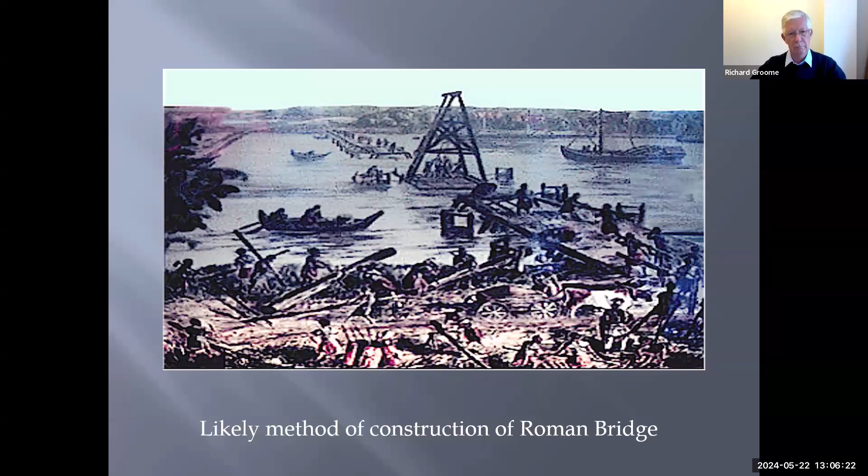That Roman bridge was almost certainly timber, because remains have been found on the north bank of the River Thames. The port of London, or Londinium as it was known then, developed on the north bank, and the tide of the Thames enabled seagoing vessels to visit. Also, because this was the lowest bridge on the Thames, it helped the Romans control southern England up to about 410 AD. After that, things are uncertain.

Does anyone here read Bernard Cornwell, or in particular, have you seen The Last Kingdom on Netflix with Uhtred, son of Uhtred? These novels were set in 871 to 899, that's King Alfred the Great's time, and he referred to a breached London Bridge with a great river flowing through his middle. At vast expense, I have contacted Bernard Cornwell, and he believes that this was still the Roman bridge.

But it was not to last much longer, because in 993, King Olaf of Norway was able to plunder Staines, about 30 miles inland, without encountering a bridge anywhere on this route. The next reference to the bridge thought to be reliable is in the time of Ethelred the Unready—Unready actually means ill-counselled in Anglo-Saxon, so he wasn't very well advised. But London was held by the Danes at that point, with a large fortress at Southwark on the southern side of the bridge, and a fairly stout timber London Bridge, heavily fortified.

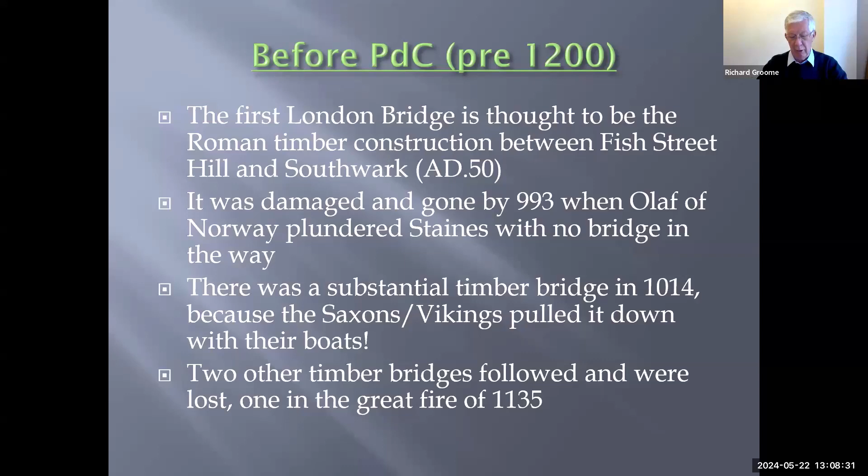Ethelred, supported by Olaf the Norseman, attacked the bridge in 1014 and were initially beaten off, but they then tied their ships to the bridge and rowed downstream, taking the bridge with them. Hence the expression and the song, London Bridge is falling down.

It is mentioned again as a whole bridge in William the Conqueror's charters of 1067. It was swept away again in 1091, destroyed by a great fire in 1135, far more damaging to London than the famous Great Fire of 1666. Small wonder then that the city, the church, and the king together decided to invest in a completely new bridge, and they appointed Peter de Colchurch to be responsible.

Was he an engineer? Well, no, he wasn't. He was a chaplain of St Mary's Church, where Thomas Becket, then the Archbishop of Canterbury, had been baptised. So the new chapel on London Bridge would be called St Thomas's, the starting point for pilgrims going to Canterbury. And it would stand on the great pier in the middle, taking the full force of wind, weather, and the river.

Peter de Colchurch's bridge would stand for over 600 years and was the only bridge in central London for 540 of those. It took 33 years to build. 10 of those were sort of wasted using a wooden construction, and they then switched to stone, which was interesting because there wasn't any stone for miles and it had to be shipped from places like the West Country of UK.

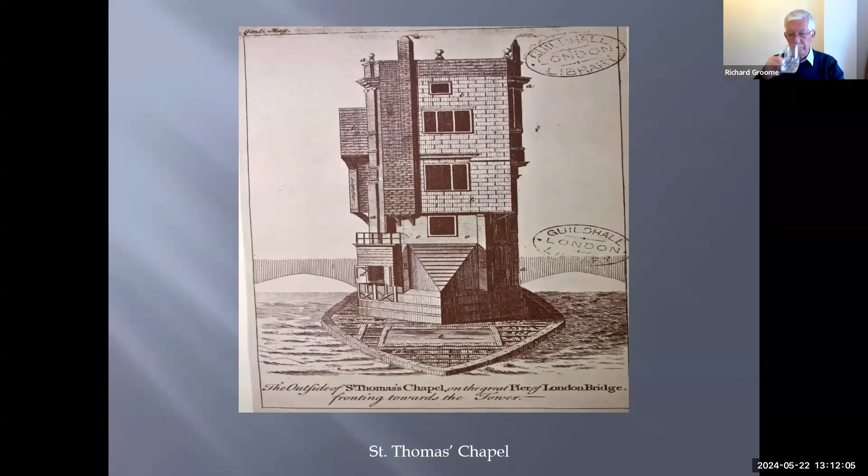There was nothing like this bridge in the rest of Europe, with the houses and shops ordered by King John to help pay for the upkeep. And such was the greed of the developers that many of the houses were there before the bridge even opened. Their upper stories projected across the street and out across the river, often propped up precariously, as you can see in this picture.

This was to get maximum income with very little space available. They were all built of wood. This picture in the London Museum is actually 400 years later, but it shows the idea quite well.

So underneath, the only road into London, barely 12 foot wide, swarming with people and animals and wagons, and underneath the perpetual noise of the water. Imagine the noise, smells, and congestion. Crossing the bridge could take an hour.

All the new houses were destroyed by fire within 3 years of their construction, with hundreds of people killed. There were frequent fires and quick housing replacements for many years to come, until the houses were removed by Act of Parliament in 1758.

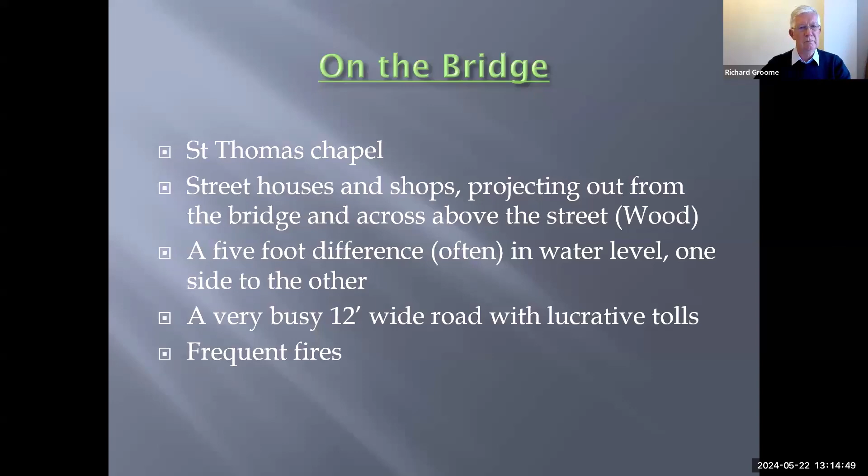The first person to go onto the bridge in terms of his head was William Wallace, or Braveheart. He was followed by Thomas More in 1535 and Thomas Cromwell in 1540. You might be interested in the demise of Oliver Cromwell, by the way.

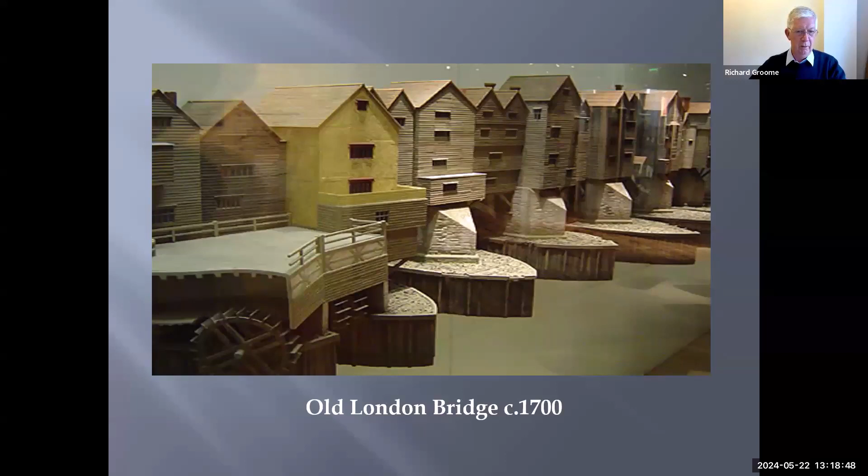But despite being picturesque and famous, London Bridge was very dangerous and very expensive. A whole house, complete with occupants, fell off the bridge in 1438. You can see there the water wheels on the northern side of the bridge, and the corn mills, I believe, are on the other side. That's a model in the London Museum.

So the bridge sank as it got older and heavier, losing its gentle slope up to the middle and ending up flat. Even then, they added those corn mills in the 16th century and the water wheels on the other side.

They all went up in flames in 1633, were rebuilt, and lost again in 1666. By this time, the bridge was so weak that £1,500 — a fortune, actually, worth about £1.5 million at today's prices — was spent shoring it up again.

In 1722, to reduce congestion, traffic was ordered to keep left. This good idea soon spread to other parts of the UK and is the origin of us driving on the left.

Another fire in 1725 caused a rebuild from the foundations at the Southwark end, where there was also a wooden drawbridge. It's all downhill from then for London Bridge — Nonsuch House had become a shop and the chapel a paper warehouse.

The opening of Westminster Bridge in 1749 was the death knell of old London Bridge. It was wide and spacious with no houses, so they took the houses off London Bridge and widened the centre arch, which the river tore through and ate away.

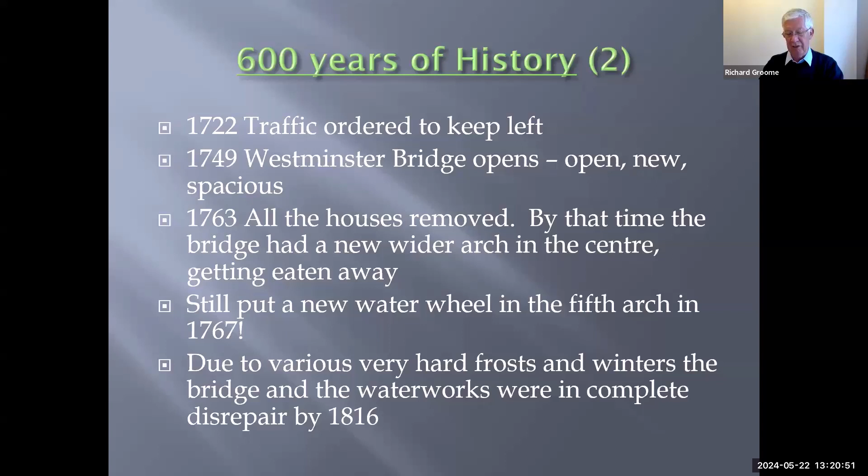They even then put in another water wheel in 1767, restricting the side flow even further. Then there were a series of vicious frosts in 1768, 1785, and 1789. By the start of the 1800s, the bridge was in total disrepair.

Here's a cartoon, top left, called the Melancholy Bridge, from 1758. And one of the fires in the late 1700s — that's the waterworks going up in smoke.

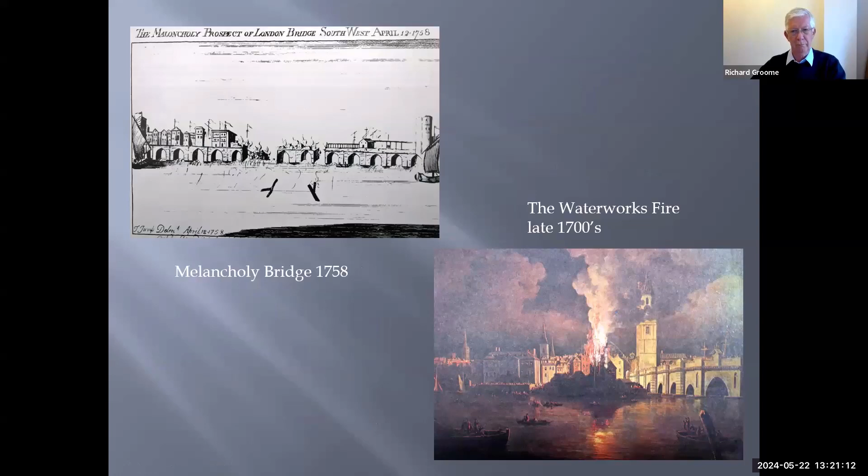A guy called William Gifford, in the Quarterly Review during 1814, said, 'This pernicious structure has wasted more money on perpetual repairs than would have been sufficient to build a dozen safe and commodious bridges, and has cost the lives perhaps of as many as 1,000 people.'

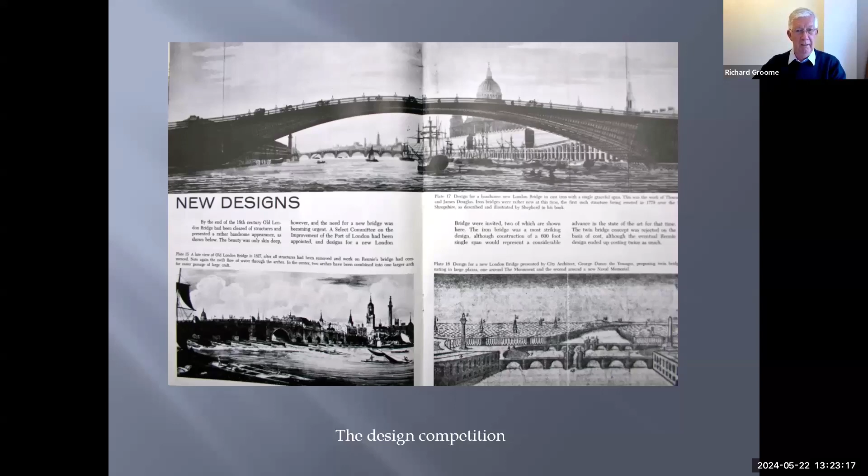We'll just talk about finance briefly. In 1821, Old London Bridge had an annual income from tolls of £30,000. There were $5 to the pound in those days, so that was $150,000. John Rennie's estimate for the new bridge was £450,000, so it would pay back in 15 years. In the event, a special toll on coal was introduced to pay for it more quickly.

John Rennie Sr. died almost before the work was started, so it was his son, also called John Rennie, who actually built the new bridge. It was built 100 feet west of the old bridge, which remained open until the new bridge was completed.

It was thought that once the bridge was demolished, the increased river flow might sweep away Westminster and other bridges now upstream, and they did actually require rebuilding or strengthening in some cases. But the worst did not happen.

You'll also remember I said that we would meet Peter Colechurch again in 1830. Well, it's during the demolition of the old London Bridge that his bones were found under the old chapel, but they were carelessly thrown into the river by a workman. What a shame.

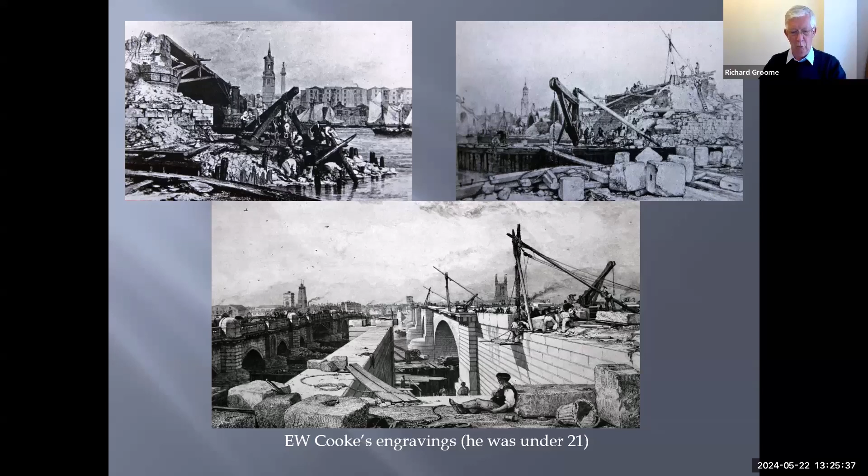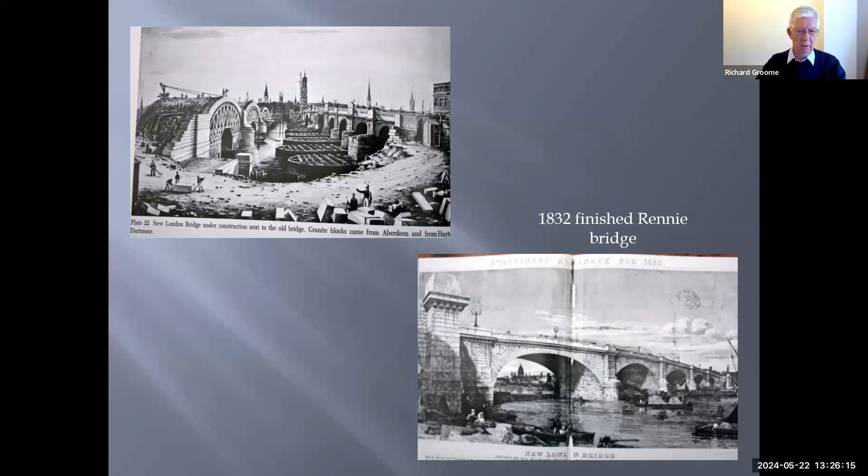The Rennie Bridge was pretty much solid granite and weighed 130,000 tons. It took 6 years to build and ran 18 months late—a typical civil engineering project in the UK, I might say.

It had a magnificent 53-foot wide roadway, but was so crowded with horse-drawn vehicles that it was said you couldn't cross London Bridge without seeing a white horse. It was now that the new railways were bringing in large numbers of commuters, so further weight was added to the bridge, with the addition of outer footpaths.

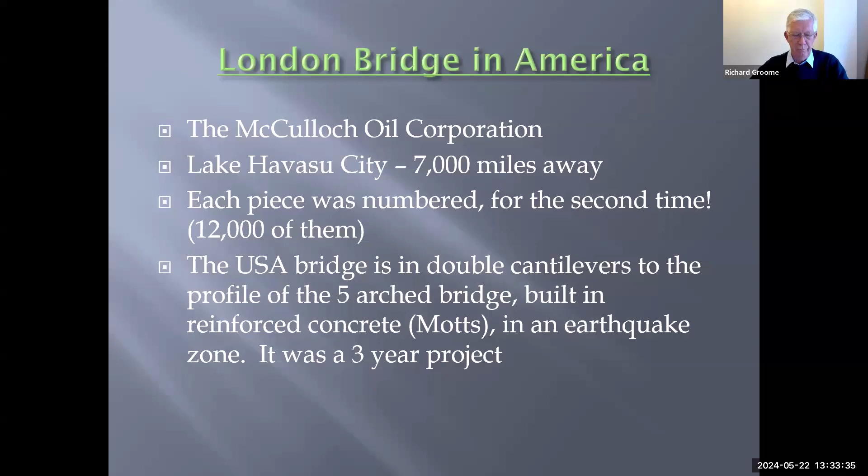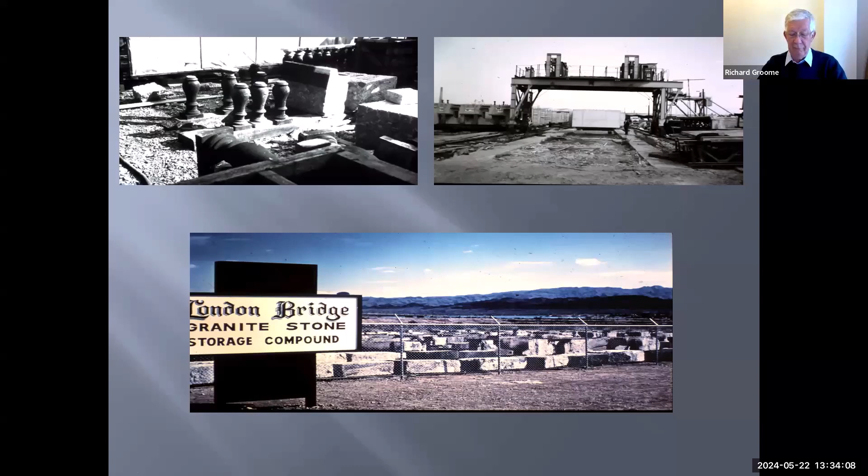It was discovered that the stones had been numbered once before, by Rennie no less, when the original bridge had been built.

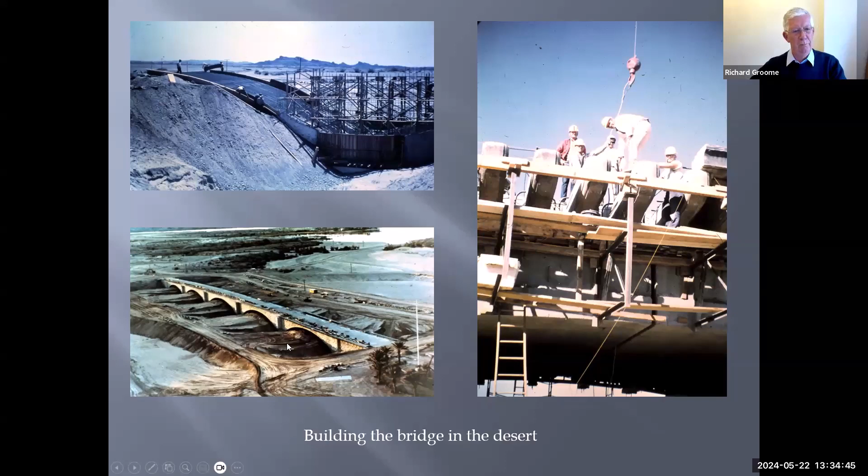So here we are in Lake Havasu City, where instead of using formers to build the arches, they used the sand, because this was a desert. There wasn't any water there, so they could just make an arch out of the sand, construct the new bridge underneath the shell of the old London Bridge, take out the sand afterwards, and then eventually put the lake under it.

Those pictures show the result of that. And that top right picture I promised you earlier is pretty much the same view as they took in 1832 when it was in London.

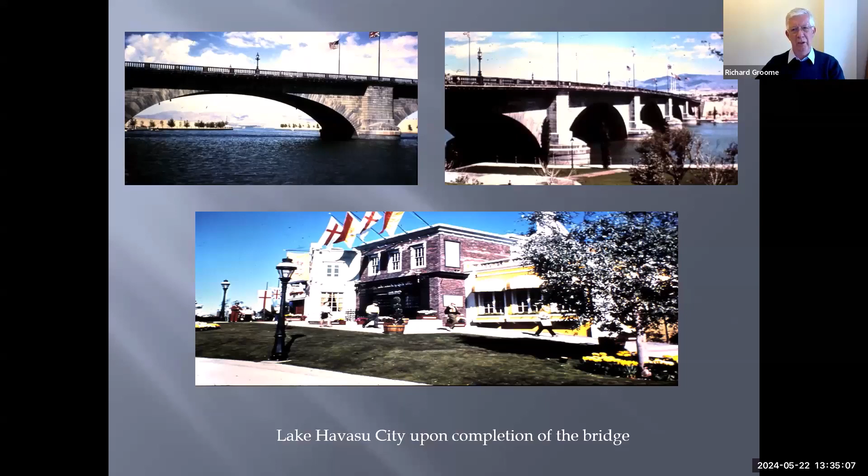Now we go back to the current London Bridge, called the New London Bridge. This was designed on the same centre line as the Rennie Bridge, so not built to one side like the old bridge had been. This time it would only weigh 55,000 tonnes. Work started in November 1967 and continued until 1972, but at no time was the main traffic or pedestrian flow stopped. You will see how it was done in a moment.

It is a 3-span, pre-stressed, post-tensioned concrete bridge designed as 4 parallel box beams. So it's hollow, and I have walked through it. It was built as 4 bridges joined together and was until recently the only hollow bridge over the Thames.

The new foundations are 100 feet below high water and were excavated by hand. They are 26-foot diameter at the base and 12-foot at the top. And of course, while they were digging this out, just alongside was highly stressed clay supporting the existing bridge. It must have been a tricky job.

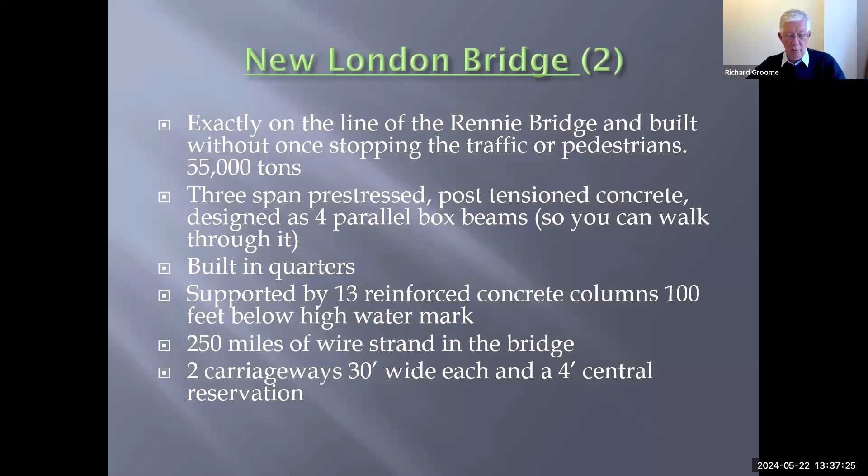A gantry was built over the top, I'll show you a picture in a moment, to take all the construction loads. Londoners speculated they would have to cross this gantry to get across the river in whatever weather. That wasn't the case, of course.

First, the upstream footway was taken off the old bridge and the first quarter of the new bridge constructed. Pedestrians went onto the one remaining downstream footway, which was widened at the expense of carriageway width. Then traffic went onto the new quarter bridge, pedestrians onto the carriageway of the old bridge.

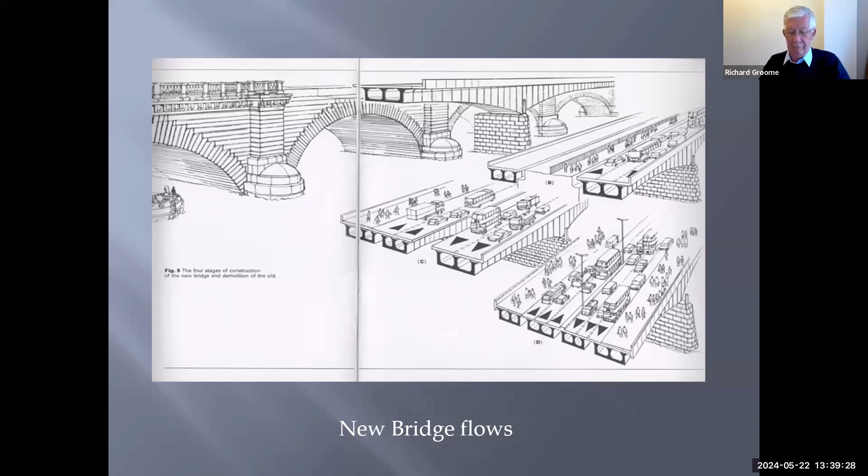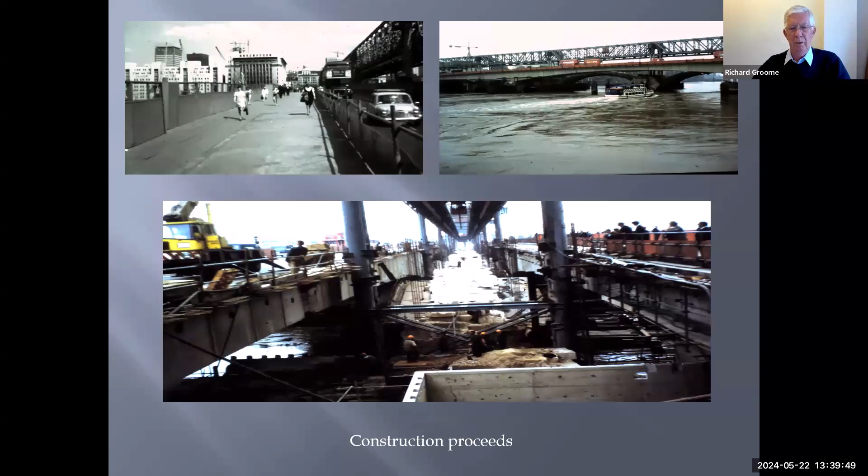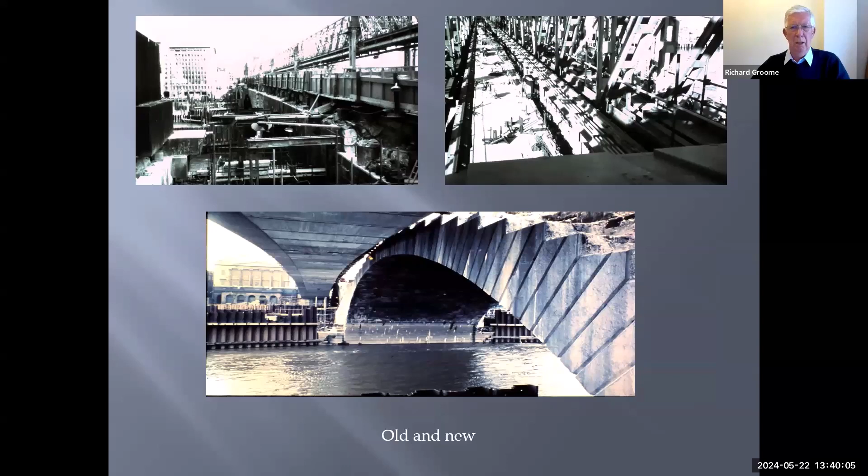There's some pictures inside the bridge of the hollow section and the reinforcing rods. Eventually it was opened on the 17th of March 1973 by the Queen. A most amazing project.

It looks after all the city bridges. That's City of London bridges, so things like Dartford and so on aren't included. It was a significant contributor to the new Millennium Bridge built in 2000. It gives notable amounts to charity and has about £500 million worth of commercial property. Not bad for a toll collecting fund that these days gets nothing from the users of the bridge.

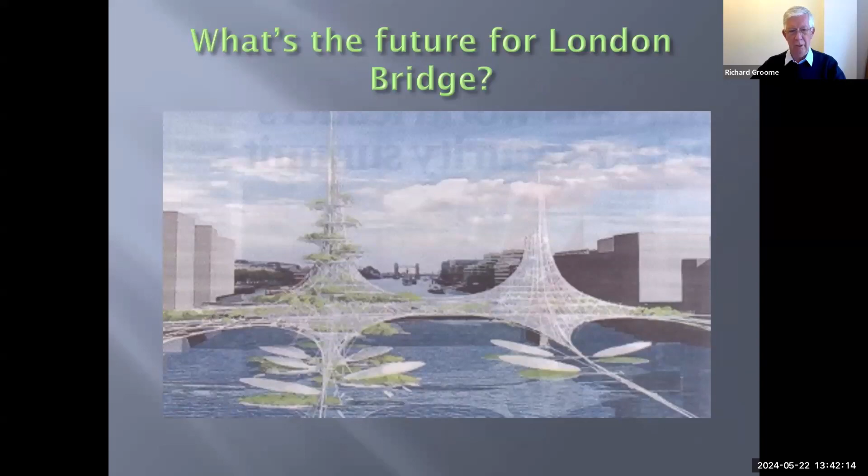So now we've covered 815 years of history and 4 bridges. So I will stop sharing now and invite any questions.

Thank you for listening. Richard, that was marvelous. Thank you. That was just a complete story with all kinds of delightful chapters, and I really enjoyed it very much.